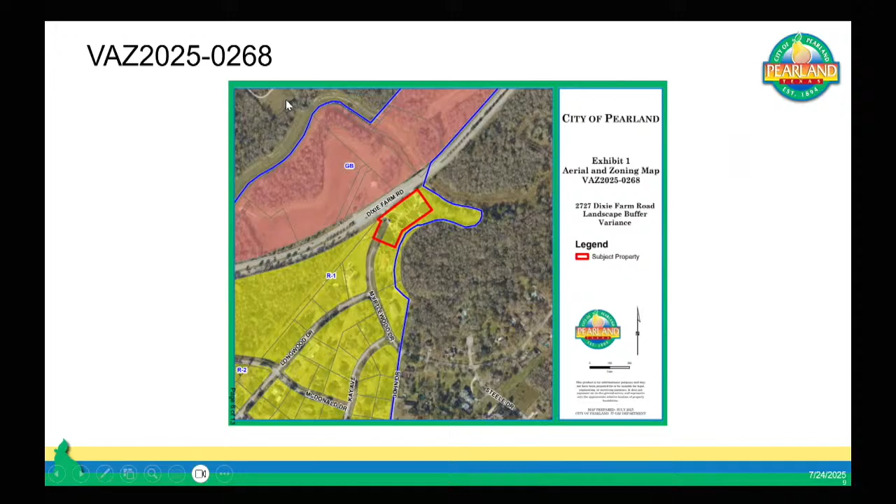Across the street is property owned by the city of Pearland at this time. It is also undeveloped. Across the street is zoned with that GB zoning district, and then there is the R1 and residentially zoned lots to the south/west of the property here.

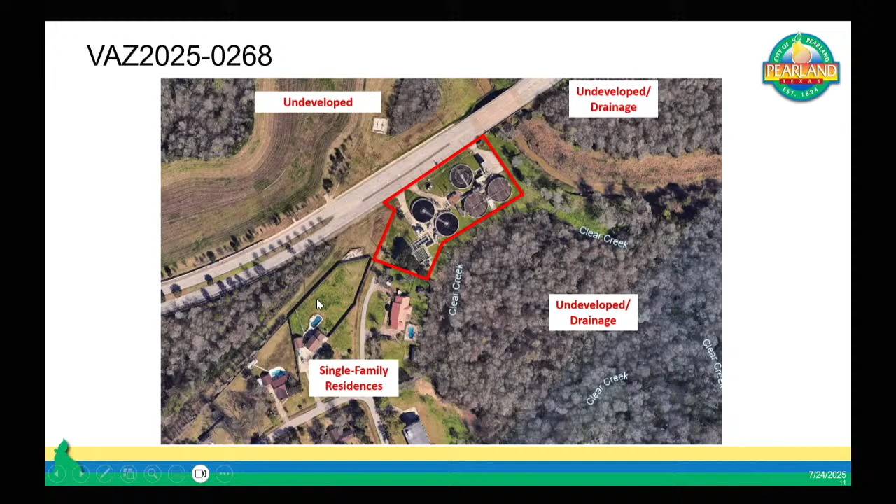The history of this site is that it was annexed into the city in 1960 and established as the Longwood Treatment Plant in the mid-1970s. It was platted in 2011 as the Longwood Treatment Plant.

These pictures from Google and our interactive map show the area we will be discussing tonight. The water treatment plant is here. On the screen you can see the big circle that is the building you're familiar with as you drive past. You can see my dashed red line here, runs approximately where the red reflective signs are that you're seeing in this picture.

As a portion of the plat, this portion, or actually by separate instrument, however it will be reflected on the plat, which is being presented next month. The right-of-way here is being acquired by this property. The portion of the property which is requesting a variance is this section here, highlighted in yellow.

While there is space to allow for the required buffer adjacent to this residential property, which is this gray line that comes along the yellow line here, that area is within an easement for a pipeline and has existing utilities in it. I'll show you that on the next slide.

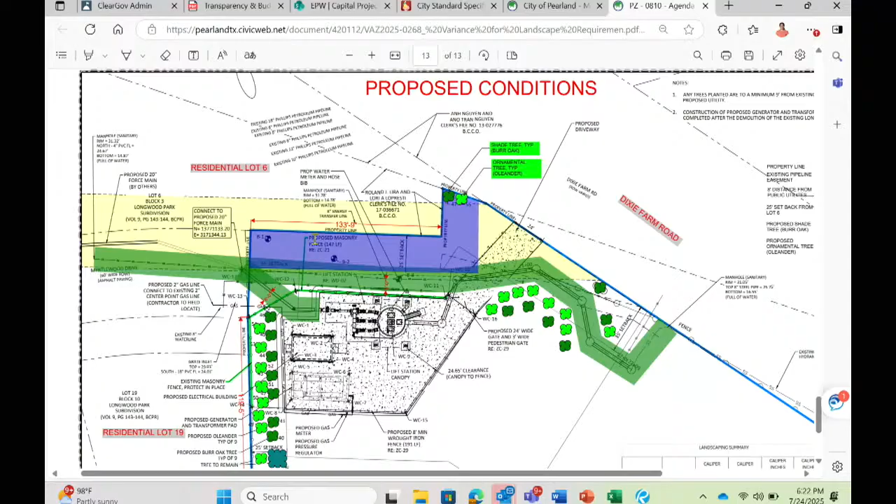Okay, anyone else? Any other questions? Do you have a picture of the fence? There's a picture of the fence included in the staff presentation, but that fence is going to be added upon with a masonry fence. I don't believe we've got a picture of the masonry fence yet, because it hasn't been finalized. Were you asking about the masonry fence that's going to be along Dixie Farm?

Yes. So we don't have a picture of it, but we may have a rendering. We don't have the rendering. Do you have anything? No, but do you have the rendering, like something that we're planning on installing? Maybe we could provide a better picture with words of what that masonry fence is going to look like, so that they know what is being done to address any potential concerns with the adjacency to the public. Okay, we can do that.

Who wants to be the verbal describer? Sheldon. Mr. Buck, if you are going to actually speak, we will ask you kindly to introduce yourself for the record. Okay, yes, thank you. My name is Sheldon Buck. I'm with Freese Nichols. My address is 10,497 Town and Country Way in Houston, Texas.

What we are proposing is an 8-foot tall masonry fence in that area. The state requires a lift station to have a fence itself. They allow for a 6-foot tall fence with barbed wire or an 8-foot tall fence. We don't want to put the barbed wire, so we're proposing an 8-foot tall masonry concrete fence that has kind of a rock look to it.

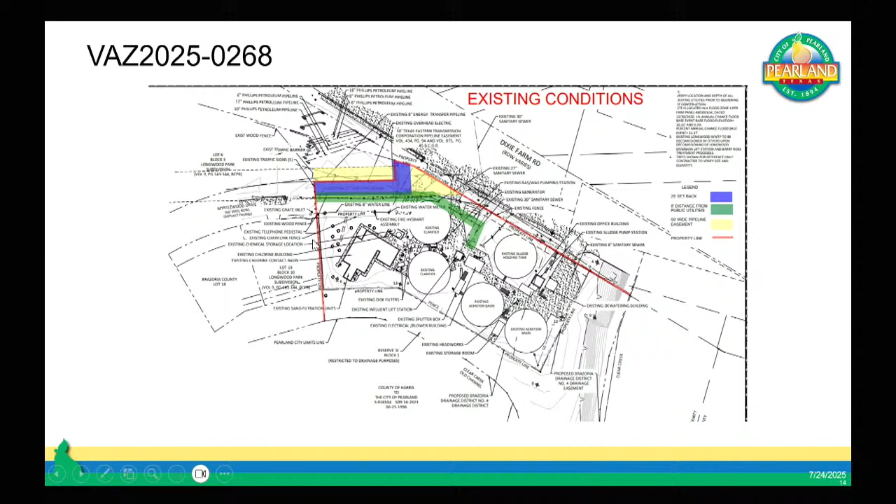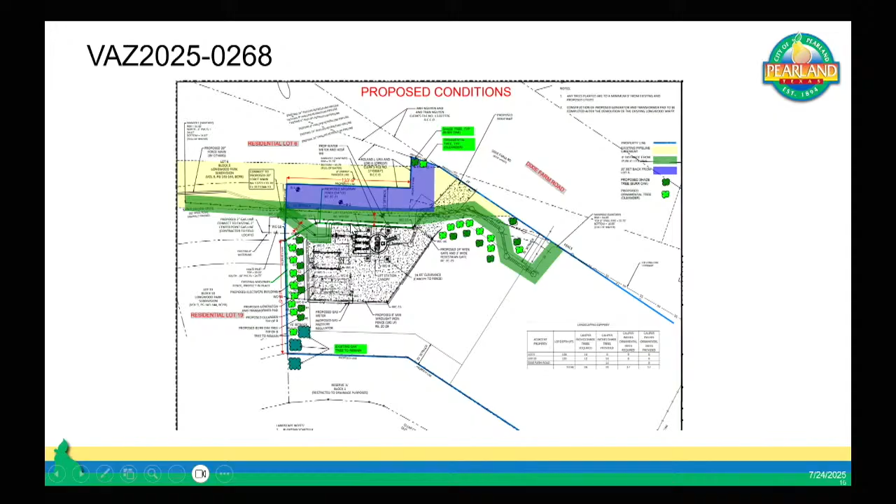I was just curious. Well, I guess that's not going to be visible from the road though, will it? So the site plan indicates that there would be a fence or a wall at the back of Myrtlewood Drive. Okay, so Myrtlewood will dead end into a fence wall. I've zoomed in kind of aggressively here, but this green line you can kind of see right here is that proposed wall that will run here.

Essentially, everything south and west will have a wall around it, and it will tie into the existing fence. The fence adjacent to the residential property next door already has a masonry 8-foot fence at the rear.

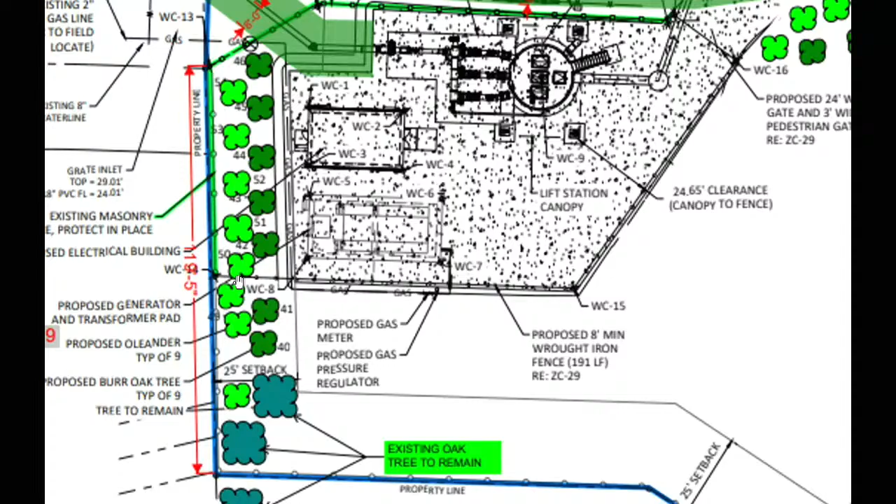I have a question. Why would the new trees be inside the fence instead of being outside the fence area?

The location where they can be placed with the existing utilities allows for them to be here. However, there's a gas line that runs right here. Our ordinance does not specify which side of the wall they need to be on, just that there is both vegetative and masonry screening placed there. A fun fact, and you're looking at a very focused portion of the lot itself.

When you zoom out a little bit, that's private property just on the other side of the fence there. So this is fitting as much as we can within that area, but also providing the additional screening to meet compliance.

My immediate thought was, why spend the money to put the trees there that the general public isn't going to enjoy or isn't going to absorb sound from the traffic? Why not wait until the rest of the plant currently there is eliminated, and plant those trees in an area where people can enjoy it or at least absorb traffic noise? That's just my thought, because when I served on the Planning and Zoning Board, we ran into this issue on Orange Street. To this day, when I drive down Orange Street, I get so mad because one little word was the deal. I just think it's kind of crazy for us taxpayers to pay for trees that aren't going to be enjoyed. Might as well put them out where, on the rest of the property after everything's bulldozed and moved off, unless they got plans for that.

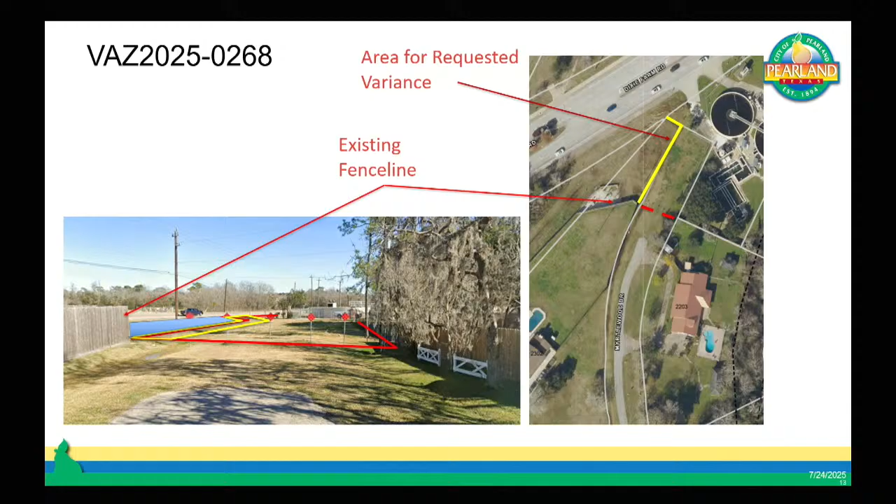So the area which is being requested for the variance, to circle back, is this blue L, which on my photograph here is the yellow L. That is the only area which they are requesting relief from, the plantings within that space. Everything else is meeting code requirement. All 3 of these processes are going on simultaneously, so we can get this project off the ground and in the ground. I just didn't want there to be a question of, whoops, should have done the plat first.

Okay, any other comments, questions, observations? I would just like to say I do recommend the approval, but I would like for the verbiage to be put in that the masonry fence be tied into the existing, maybe some language on the type of fence that will be used, the 8-foot masonry fence.

Are there any concerns from an engineering perspective that the 8-foot fence tie into the existing fence? No, we already tie into that existing fence. What we don't do is take it across the pipeline easement. The right there by kind of where those last trees are is the end point of the existing fence, and we're going to tie into it, just like shown there, and then run parallel with the lift station site. So the green space that's there, that kind of bluish area, is still going to be open.

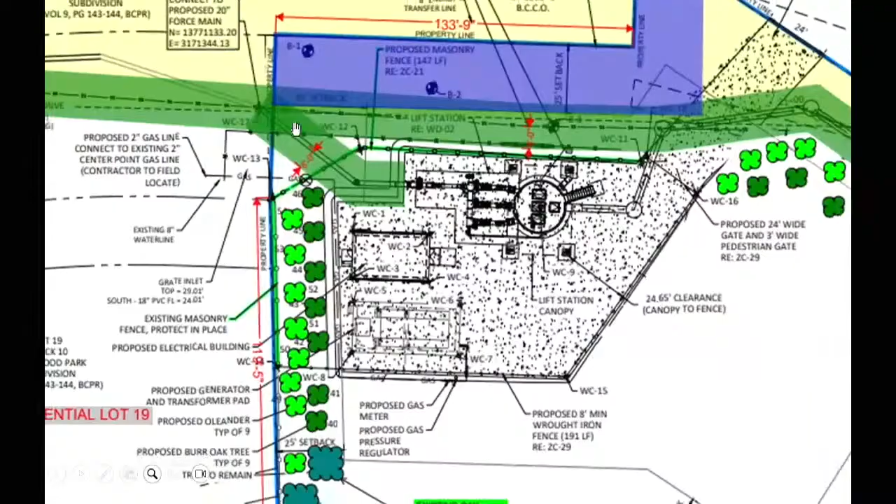We'd have the same restriction of trying to put a fence across the pipeline easement. We could put a fence across the pipeline easement, but they do not allow masonry fences. They require metal fences that you can see through, so that they can drive by and observe their easements.

Specifically, the fence that will go next to the residential, the dead end area, will that part be masonry? That part will be masonry, yes. That would be up to the chair's discretion. I don't want to say no, I'm just saying now that they're in a different portion of the agenda, that might not be possible. Sometimes it can be with the chair's discretion, and he has to say yes or no first.

It covers or does not cover a pipeline underneath the area we're talking about. I'm sorry, what was the question? This area of the fence we're talking about, I thought in earlier discussion we talked about the fact that there's an underground pipeline covered underneath the fence. Or I might have my pipeline in the wrong part of my brain, but there's no pipeline under the masonry fence, right? There's a lot of lines on the screen, which is what makes it a little confusing.

The fence, and Sheldon, feel free to correct me if I'm wrong, but the fence is on the outside of the easement, abutting it. It is not inside the easement. I may have misspoken earlier when I said that Myrtlewood would dead end and you would have a fence. That was a mistake on my part. It would be on the edge of where that pipeline is.

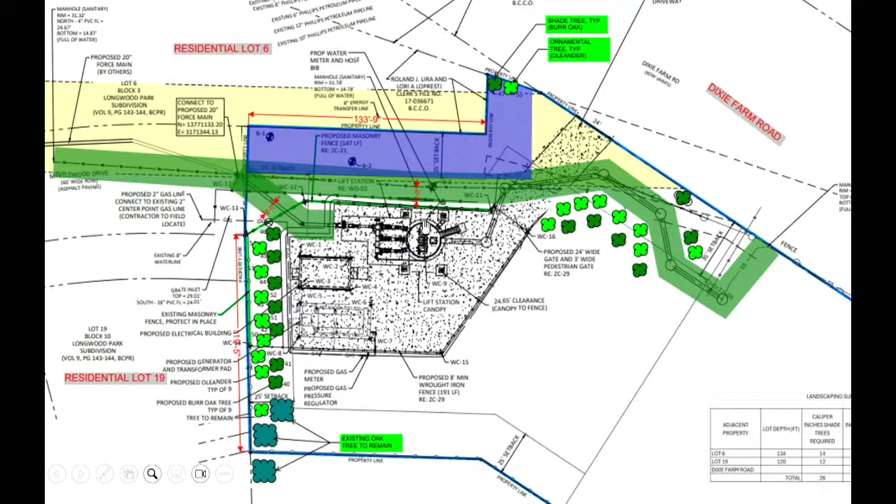Okay, so correct. But there would be a fence encapsulating, so to speak, around the whole project, essentially. There will be a fence around the entire lift station, yes, but it will be on the page below the green line that runs across there. So we were keeping the fence away from the pipeline easement and the existing sanitary sewer line that runs in that area.

The section where the reflective barrier is at the end of the residential street, is that section going to be entirely closed off with a masonry fence? It will not be entirely closed off, no. But that section of the fence isn't part of this special exception. It is not. No, it is not. I'm sorry, this variance, yeah, it is not part of the variance request. Okay, correct. All right, good.

Any other discussion, questions, issues, comments, reasons? All right, let's move into consideration and possible action. Don, could I get you to read the recommendation, make a motion? Make a motion to approve variance VAZ 2025-0268, a variance for landscape requirement for new lift station at the former Longwood treatment plant. All right, second? I'll second it. There's been a motion and a second.